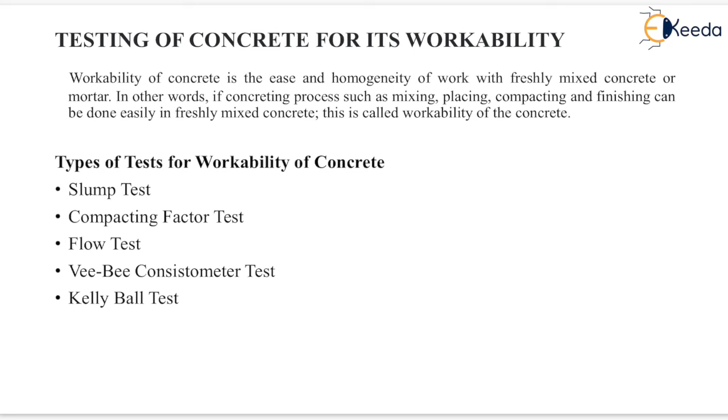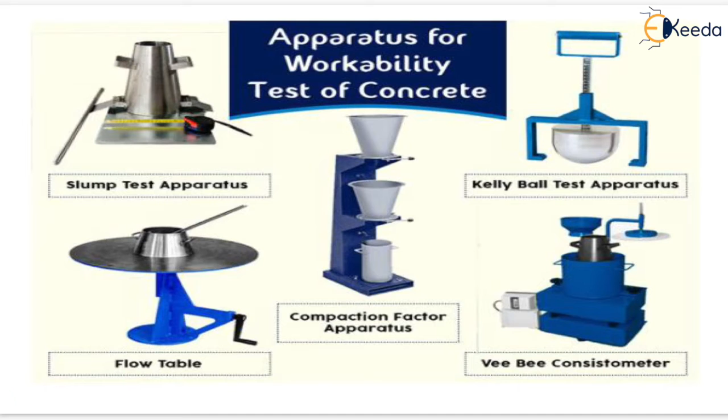Slump cone test apparatus is shown here, compaction factor test apparatus is shown here, Kelly ball apparatus is shown here, Vee Bee consistometer is shown here and the flow table is shown here.

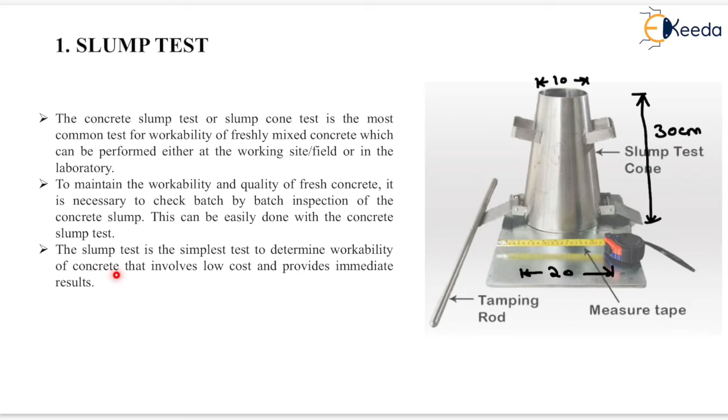The concrete slump test or slump cone test is the most common test for workability of freshly mixed concrete, which can be performed either at the working site or in the laboratory. To maintain the workability and quality of fresh concrete, it is necessary to check batch by batch inspection of the concrete slump. This can be easily done with the concrete slump test. The slump test is the simplest test to determine workability of concrete, involves low cost and provides immediate results.

Now the apparatus of slump cone test: first is the slump test cone, that is the mold, another one is the tamping rod, and the last one is the scale for measurement. This dimension is 10 centimeter or 100 mm, this dimension is 200 mm or 20 centimeter, and the height of the slump cone is 30 centimeter or 300 mm.

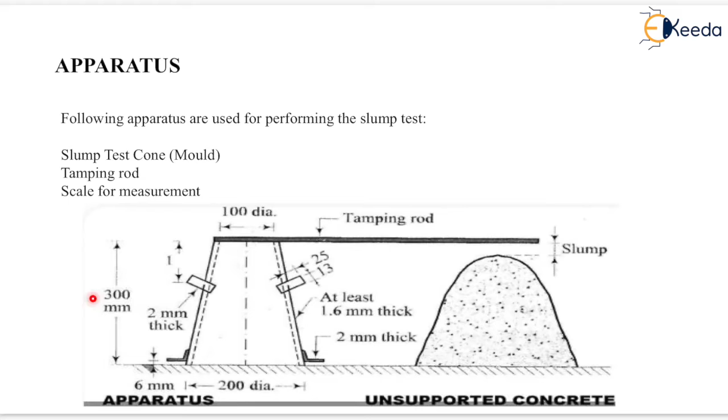Clean the internal surface of the mold and apply oil. Place the mold on a smooth horizontal non-porous base plate. Fill the mold with the prepared concrete mix in 4 approximately equal layers, with compaction of each layer by 25 strokes by the tamping rod.

Tamp each layer with 25 strokes of the rounded end of the tamping rod in a uniform manner over the cross section of the mold. For the subsequent layers, the tamping should penetrate into the underlying layer.

Remove the excess concrete and level the surface with a trowel, removing the excess concrete from the top of the concrete mold with the help of a trowel. Clean away the mortar or water leaked out between the mold and the base plate.

Raise the mold from the concrete immediately and slowly in the vertical direction. Measure the slump as the difference between the height of the mold and that of the highest point of the specimen being tested. This height that we measure is known as the slump value.

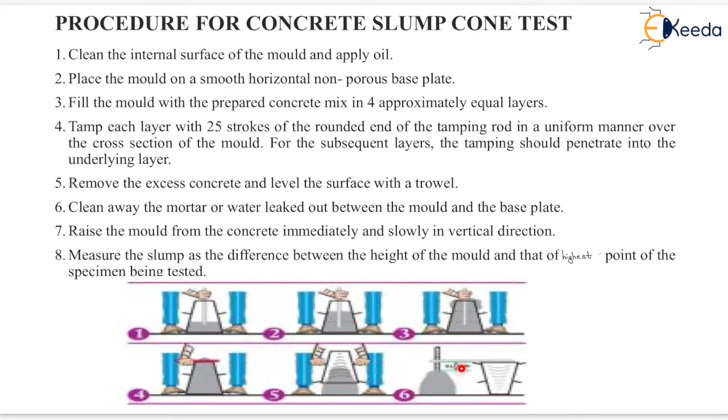Now the result of the slump test on concrete is given as: slump for the given sample equals dash mm.

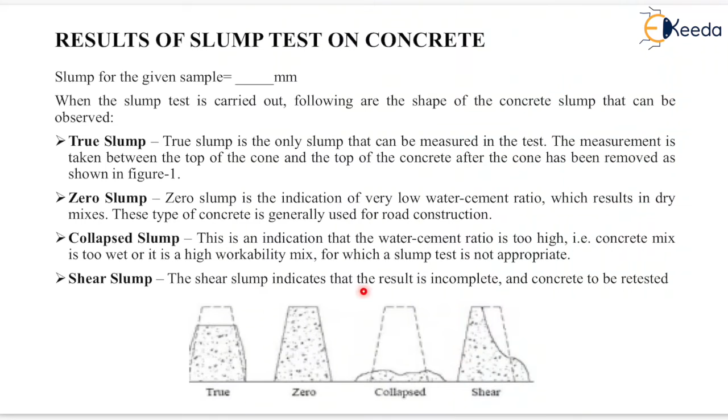Now the next is the shear slump, which is shown here. The shear slump indicates that the result is incomplete and the concrete has to be retested.

Now the recommended result of the concrete slump test as per Indian Code IS 456-2000 for plain and reinforced concrete: if the slump of concrete is in between 0 to 25 mm, then it is considered as very low workability of concrete. If the slump of the concrete is in between 25 to 50 mm, then it is considered as low workability of concrete.

If the slump of the concrete is between 50 to 100 mm, then it is considered medium workability of concrete. And if the slump is between 100 to 150 mm, then it is considered high workability of concrete.

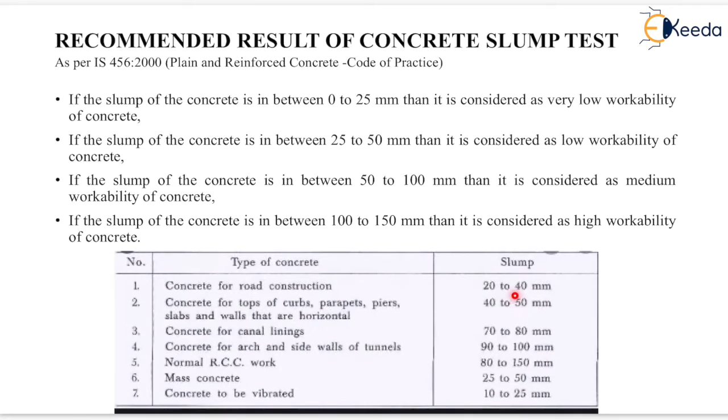Type of concrete is shown in this column and slump value is shown in this column. For concrete used in road construction, the slump value will be 20 to 40 mm, and for all other works, the slump value is written here.

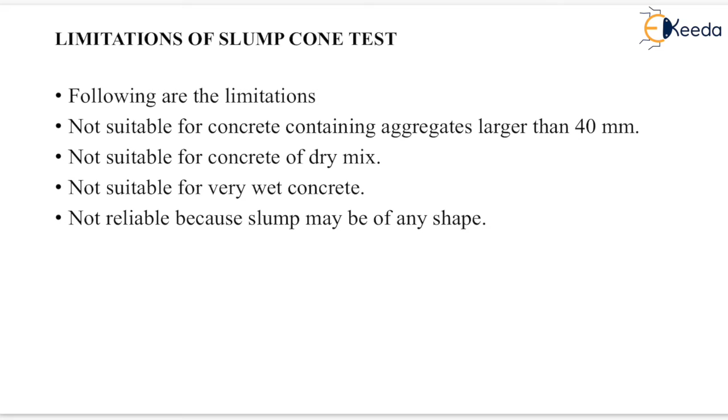Now, limitations of slump cone test. It is not suitable for concrete containing aggregates larger than 40 mm. It is also not suitable for dry mixes or very wet concrete, and it is not reliable because the slump may be of any shape.

Now the next test is the compaction factor test. According to this test, workability may be defined as the amount of applied work required to compact the concrete to its maximum density.

Compaction factor test is the workability test for concrete conducted in laboratory. The compaction factor is the ratio of weight of partially compacted to fully compacted concrete. It was developed by Road Research Laboratory in the United Kingdom and is used to determine the workability of concrete. The compaction factor test is used for concrete which has low workability, for which slump test is not suitable.

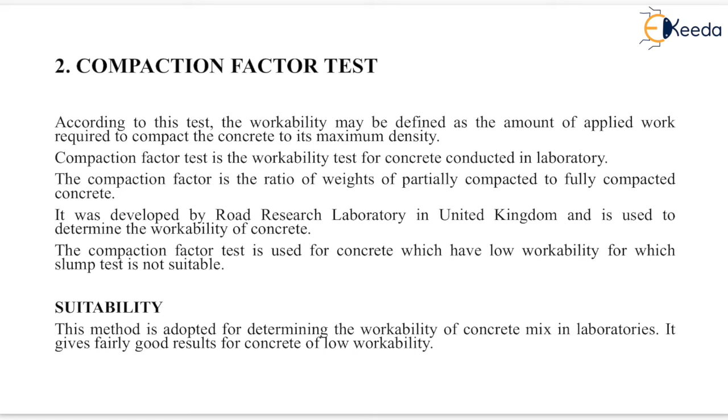Now the suitability of compaction factor test. This method is adopted for determining the workability of concrete mix in laboratories. It gives fairly good results for concrete of low workability.

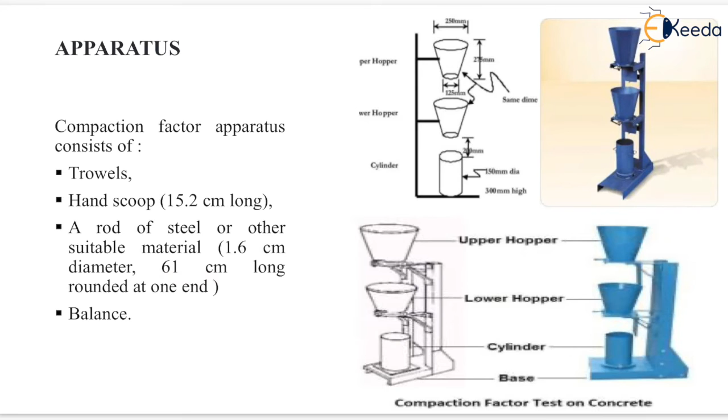Now the apparatus of compaction factor test. The first one is trowel, next is hand scoop, another is a rod of steel or other suitable material that is 1.6 cm diameter, 61 cm long, rounded at one end, and the last one is balance.

Procedure of compaction factor test on concrete. The test is performed in the following steps. Place the concrete sample gently in the upper hopper to its brim using the hand scoop and level it. Cover the cylinder. Open the trap door at the bottom of the upper hopper so that concrete falls into the lower hopper. Push the concrete sticking on its sides gently with the rod.

Open the trap door of the lower hopper and allow the concrete to fall into the cylinder below. Cut off the excess concrete above the top level of the cylinder using trowels and level it. Clean the outside of the cylinder. Now weigh the cylinder with concrete to the nearest 10 gram. This weight is known as the weight of partially compacted concrete.

It means first we have to fill the concrete in the upper hopper. After that we remove the trap door and send that concrete to the next hopper. After filling the next hopper, we open the trap door again and allow the concrete to fall into the cylinder. Now we remove the excess concrete from the top and sides of the cylinder, and take the weight of the cylinder filled with concrete, let it be W1.

Now empty the cylinder and refill it with the same concrete mix in layers approximately 5 cm deep, each layer being heavily rammed to obtain full compaction. After determining the weight W1, we empty the cylinder and again fill it with the same concrete but in 4 layers, with each layer tamped by 25 strokes by the tamping rod to obtain full compaction.

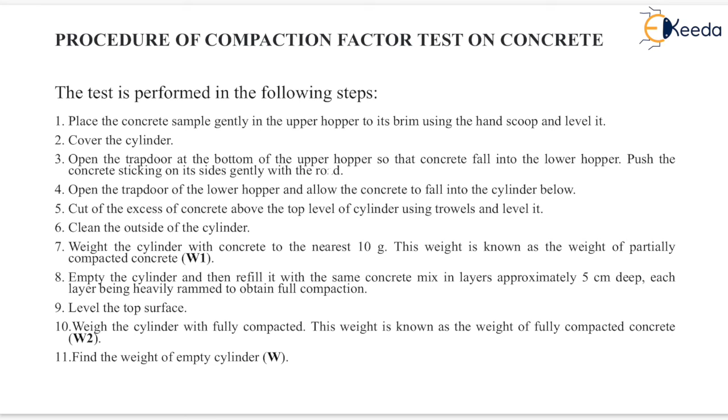Now level the top surface, weigh the cylinder with fully compacted concrete. This weight is known as the weight of fully compacted concrete, that is W2. Now find the weight of the empty cylinder, that is W.

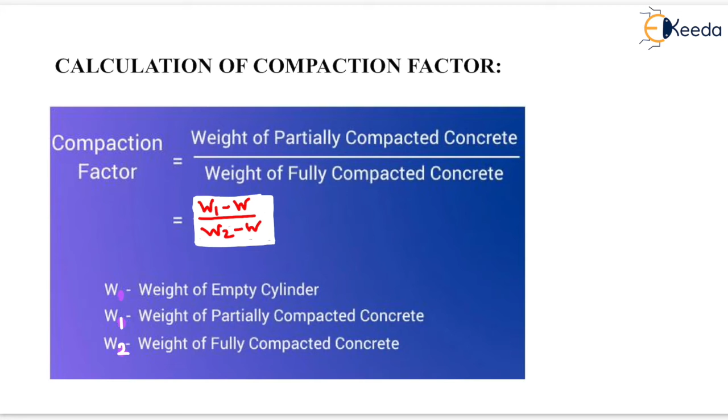Now calculation of compaction factor. It equals weight of partially compacted concrete upon weight of fully compacted concrete, that is W1 minus W upon W2 minus W. W is the weight of the empty cylinder, W1 is the weight of partially compacted concrete plus weight of cylinder. Similarly, W2 is the weight of fully compacted concrete plus weight of cylinder. So to find the compaction factor, we subtract the weight of the cylinder from both, as shown here.

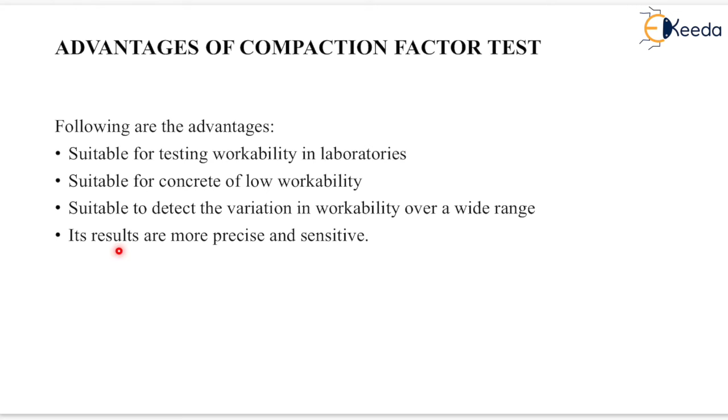Now the advantages of compaction factor test. It is suitable for testing workability in laboratories for concrete of low workability, as well as suitable to detect variation in workability over a wide range. Its results are more precise and sensitive.

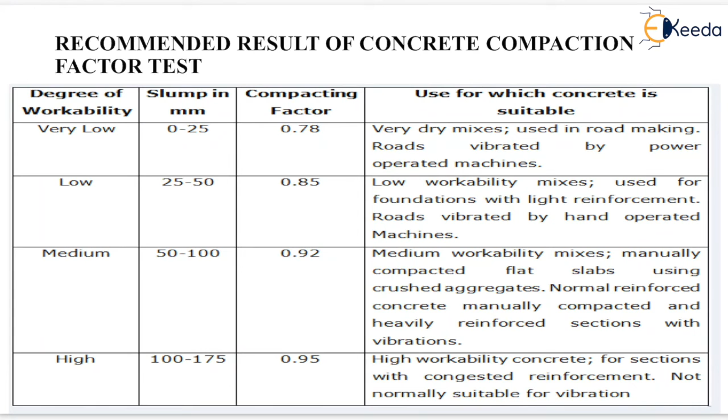Now the next test is the VB consistometer test. VB test is the pure laboratory test to measure workability of fresh concrete. It is also called VB consistometer test or VB test. The name VB is derived from the initial of V. Bährner from Sweden, who developed this test. In the VB test, workability is measured with the aspect of mobility and compactability.

In the VB consistometer test, the shape of concrete is changed from the slump cone shape to the cylindrical shape through the vibration process. This is called the remolding effect, which is measured in seconds, called VB degree or VB seconds.

The VB consistometer test is suitable for very dry concrete whose slump value cannot be measured by slump test, but the vibration is too strong for concrete where slump is greater than 50 mm. Hence the remolding activity can't be measured, or it is difficult to measure in seconds.

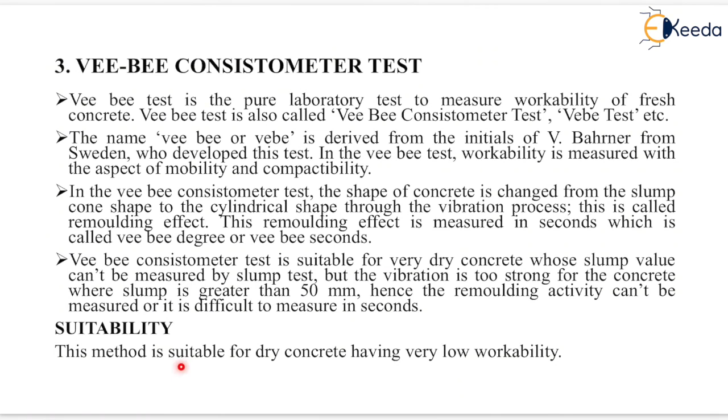In the slump cone test we determined the slump value, and in the compaction factor test we determined the compacting factor. Now in the VB consistometer test we will determine the VB time in seconds. This method is suitable for dry concrete having very low workability.

The apparatus used in the VB consistometer test includes a vibrator table, shown here. The vibrating table is 380 mm long and 260 mm wide and is supported on rubber shock absorbers and mounted on a base.

Next is a metal pot or cylindrical container, which is shown here, and it is fixed onto the vibrator table through the wing nuts, shown here.

The next one is a sheet metal cone or slump cone, shown here. The sheet metal cone is a slump cone which has 300 mm height, its bottom diameter is 200 mm, and the top diameter is 100 mm. It is placed in the metal pot just like this.

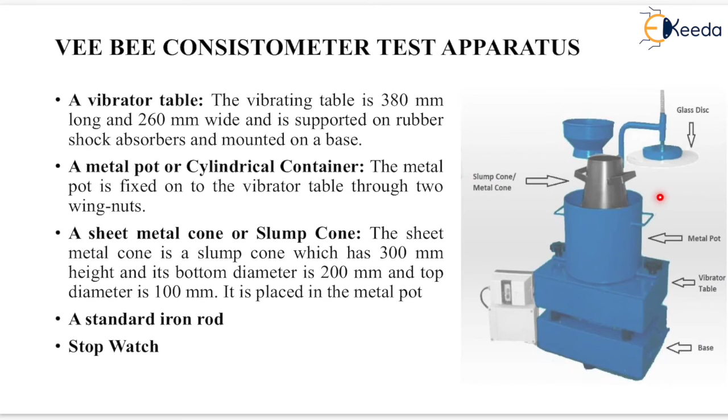A standard iron rod and a stopwatch are also needed. Now the procedure of the VB test.

Place a sheet metal cone or slump cone in the metal pot cylindrical container of the consistometer. Fill the concrete in the slump cone in 4 layers, each layer 1/4 of the height of the slump cone. Tamp each layer with the rounded end of the tamping rod for 25 strokes. After the last layer has been tamped, level the surface with a trowel.

After leveling the slump cone surface, move and place the transparent glass disc, which is attached to the swivel arm, on the top surface of the slump cone in the metal pot, and note down the reading from the graduated scale as the initial reading.

Remove the slump cone slowly and carefully in the upward direction and wait till the concrete settles in a new position. Then lower the transparent glass disc on top of the concrete and note down the reading from the graduated scale as the final reading.

Determine the slump value by taking the difference between the final reading and the initial reading, taken from the graduated rod. Now switch on the vibrator and start the stopwatch.

Allow concrete to spread out in the metal pot. The vibrator should continue till the concrete surface completely adheres uniformly to the transparent glass disc. Note the time taken for this remolding process; this time is recorded in seconds.

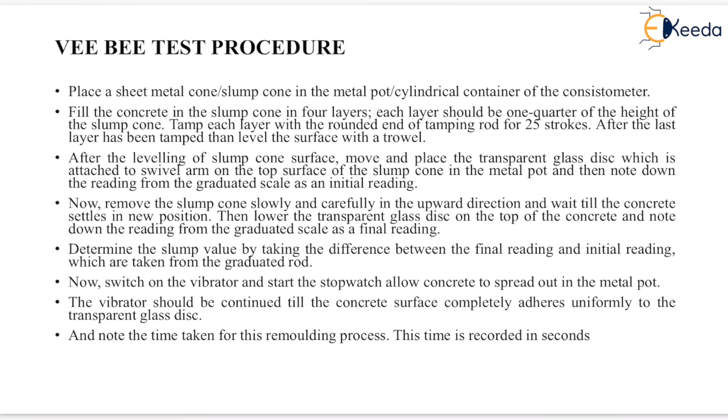Now the result of the VB consistometer test. Slump value is the difference between the final reading and the initial reading taken from the graduated rod. So slump value equals final reading minus initial reading.

Now we have to determine the VB degree or VB time. In the VB consistometer test, the shape of concrete is changed from the slump cone shape to the cylindrical shape in seconds. The required time to change the shape of concrete is known as the VB degree.

Now points to be taken care of: the apparatus should be clean and free from moisture before starting the testing. Before pouring the concrete in the slump cone, oil or another lubricant should be applied inside the cone.

While strokes are applied in the slump cone at the time of filling the cone in layers, the strokes should be applied uniformly throughout the layer.

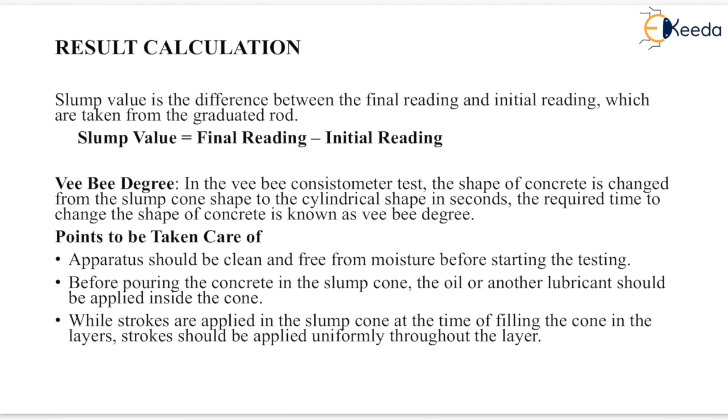That is all about the tests of concrete for its workability. Thank you very much, students.